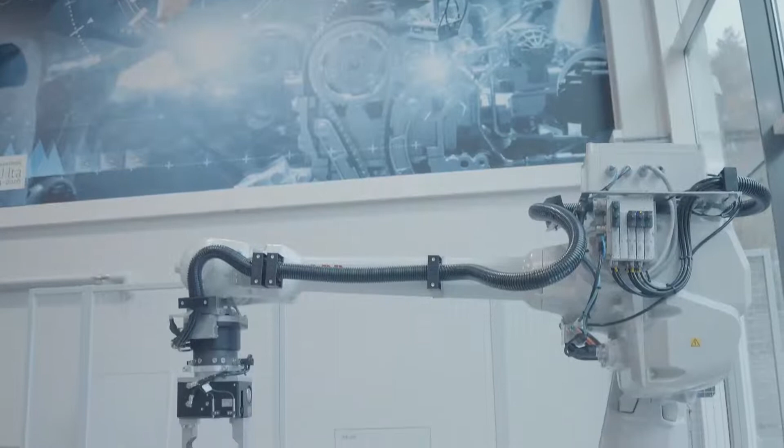JAMK is a leading university of applied sciences in the area of technology and is located in Jyväskylä, Finland. It has a strong track record as an outstanding educator for bachelor's and master's of engineering. Its focus areas cover mechanical engineering, electrical and automation engineering, logistics and information technology, but also multidisciplinary applied sciences such as automation and robotics. Automation and robotics are one of JAMK's 6 areas of expertise.

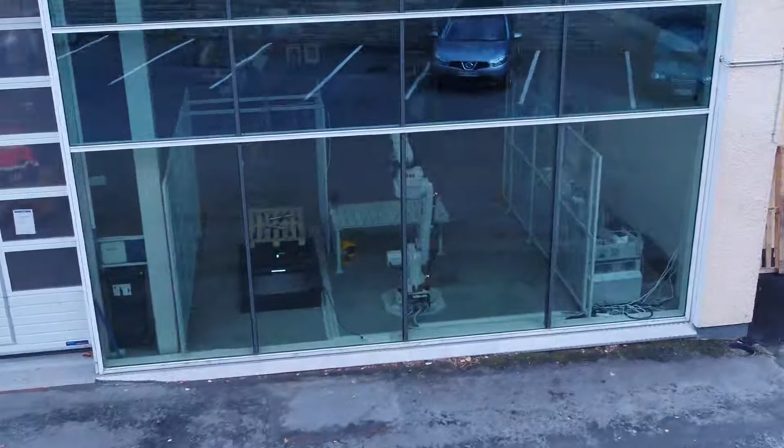Robotics by JAMK combines JAMK's multidisciplinary skills in automation and robotics. Companies and organizations can utilize Robotics by JAMK's testing, piloting, and simulation environments. We also help management and work communities to introduce robotics. The industrial robotics laboratories are located on our main campus. The laboratories cover many robotics-related environments and technologies.

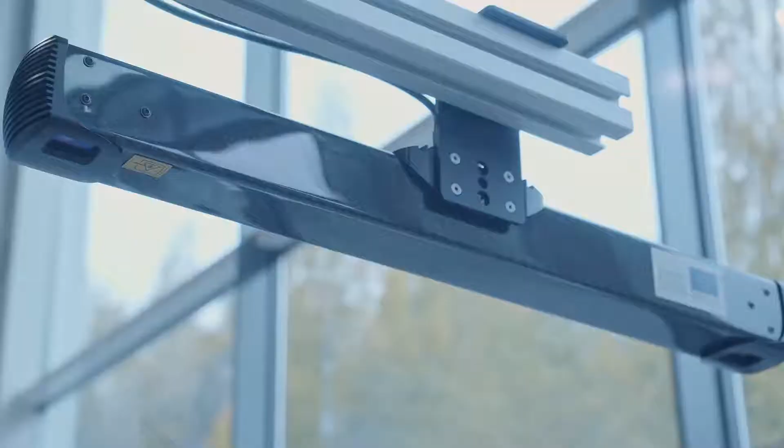The latest environment is represented by a robot cell that combines traditional industrial robotics with the latest trends, collaborative robotics, mobile robotics, and 3D machine vision. The mobile robot serves the robot cell autonomously. The 3D machine vision system detects and locates objects for an industrial robot. The robot cell ensures the efficient and fast handling of heavy objects safely.

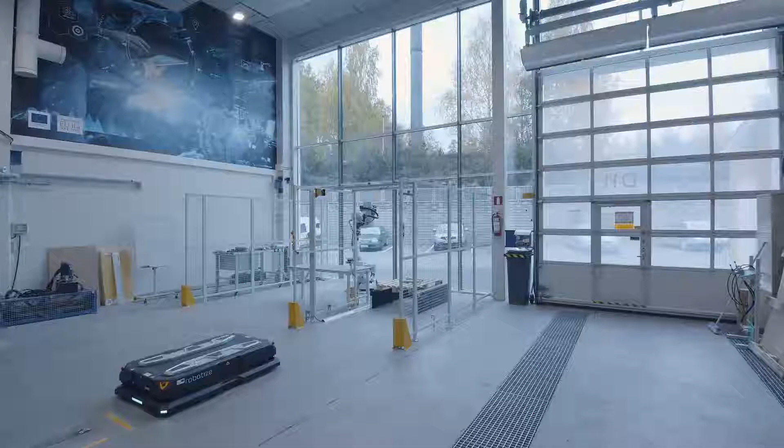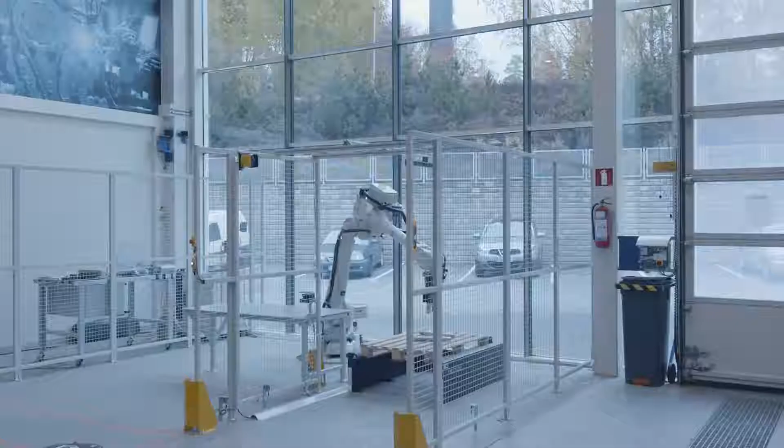When a person moves closer to the cell, the industrial robot goes into collaboration mode and slows down its speed. When a person enters the shared work area, the robot stops, and continues operating automatically when the person exits the area. The robot cell provides a wide range of applications for companies to test robotics. In training, the environment can be utilized for robotics, machine vision, and automation safety.

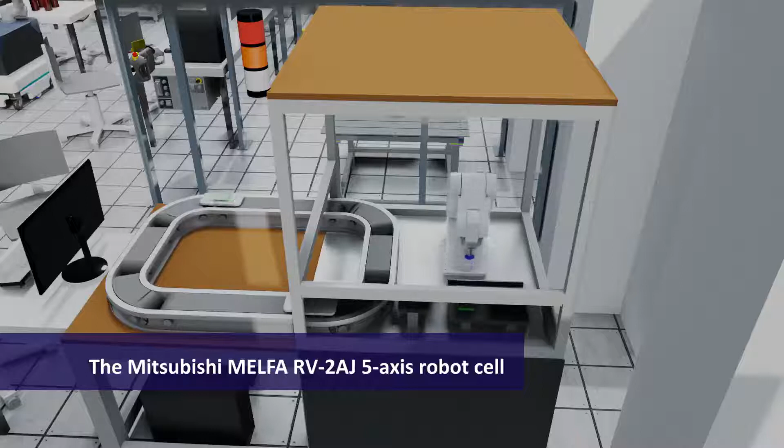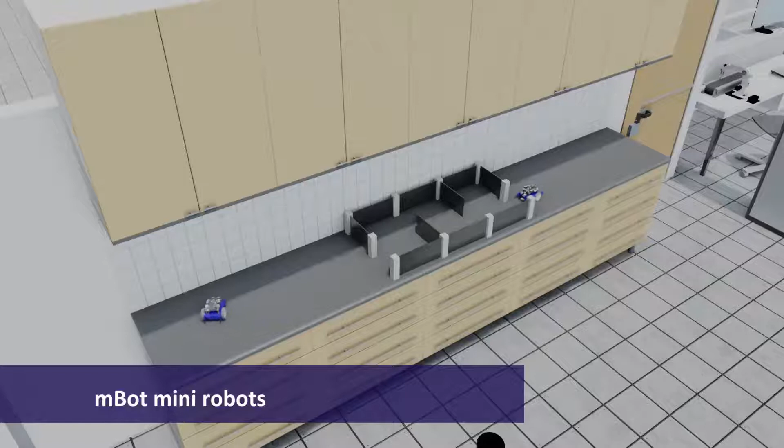Welcome to the robotics laboratory, Origo. The laboratory is utilized in engineering training and development and research with companies. The Mitsubishi MELFA RV-2AJ 5-axis robot cell represents an older robot environment still used in robotics and machine vision teaching. The lab has mini robots from different manufacturers, for example, for teaching programming. These mini robots driving on the table are mBots.

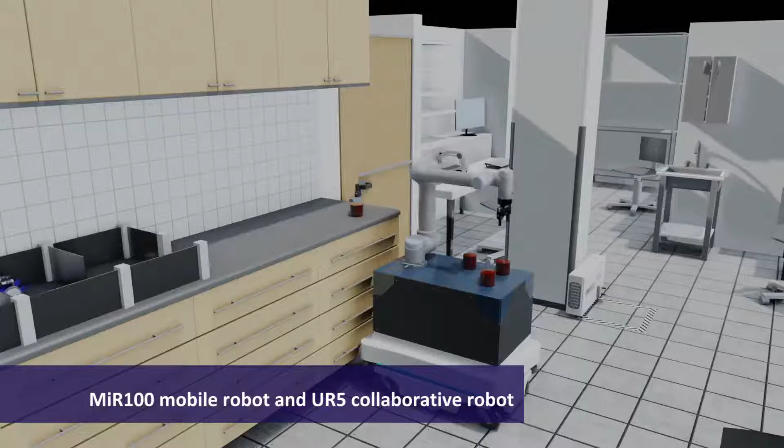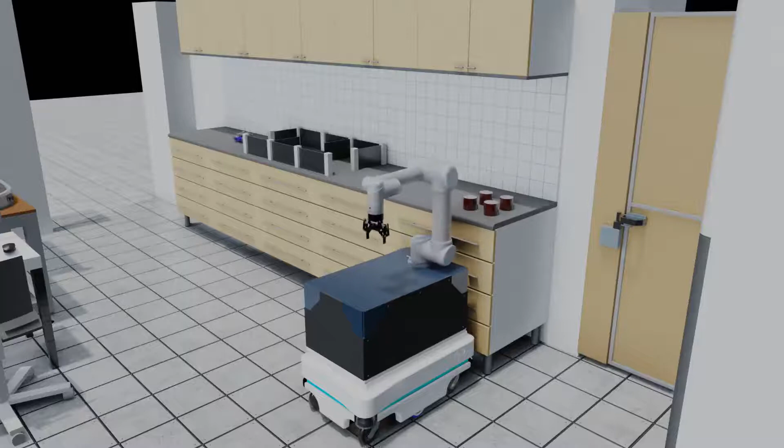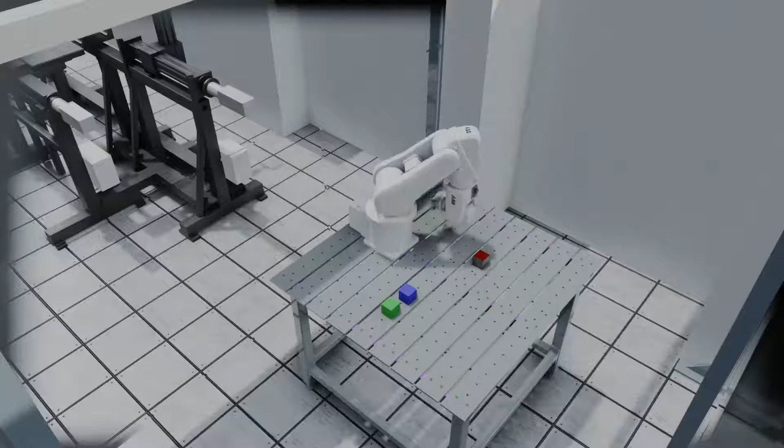The MiR100 mobile robot and the UR5 collaborative robot can be used separately or integrated together to collaborate with people. New robot technologies enable the moving of laboratory environments from one location to another, and if needed, also to company premises. The ABB IRB 120 6-axis robot cell is one of the most general environments in engineer training. The robot has 3 tools and an automatic tool changer.

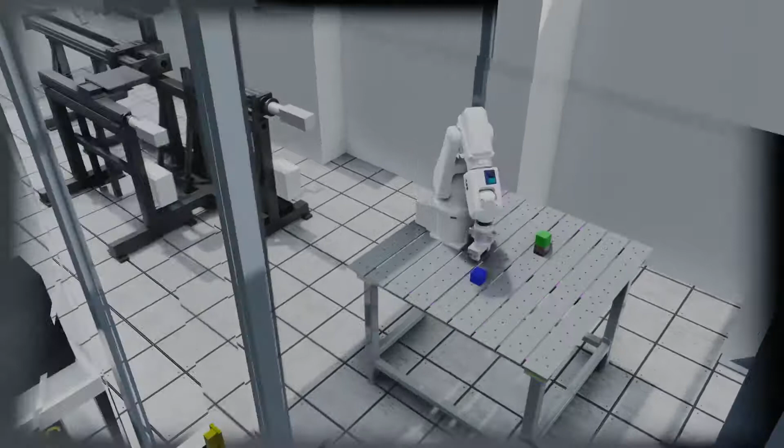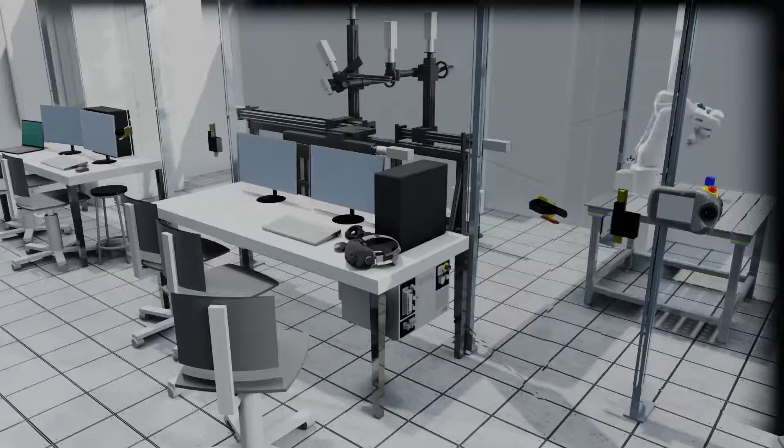Training includes many simulation environments such as ABB RobotStudio and Visual Components. VR glasses allow us to see, for example, robot cells working in a car factory. This lab presentation is also done with Visual Components. Companies can test machine vision applications on a survey station. The survey station can be used to find optimal imaging geometry for a company's applications.

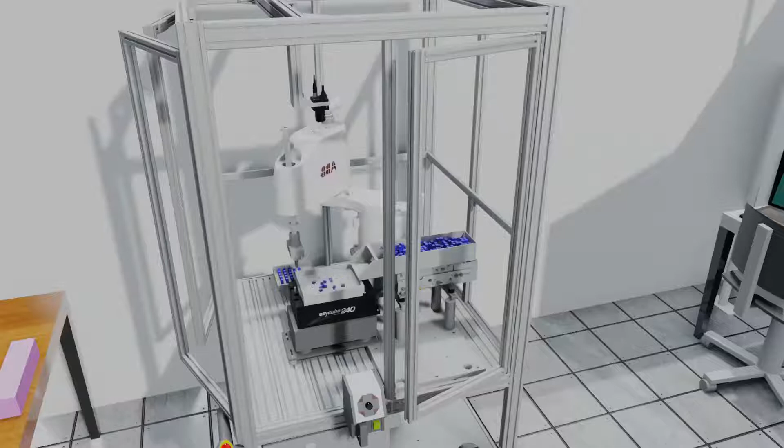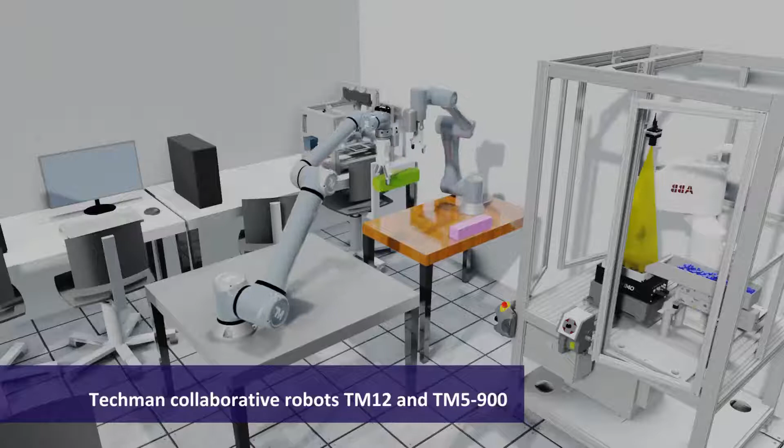The ABB IRB 910SC is a SCARA-type robot with integrated machine vision and an object sorter. The SCARA cell can be used to handle small objects, especially in speed-sensitive applications. Our 2 Techman collaborative robots can work together on 2-handed applications. The smaller collaborative robot can handle 4 kilograms, and the bigger can handle 12 kilogram loads. Both robots have integrated machine vision systems and electrical grippers.

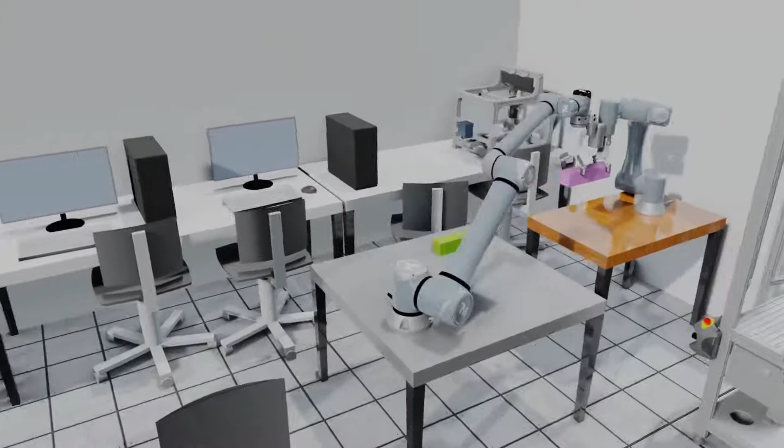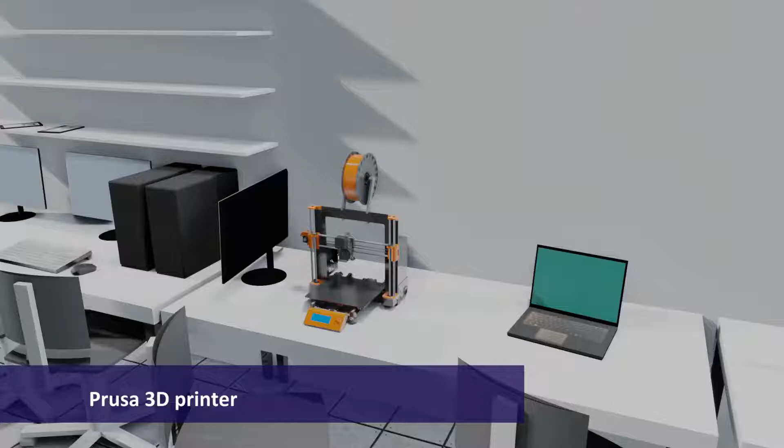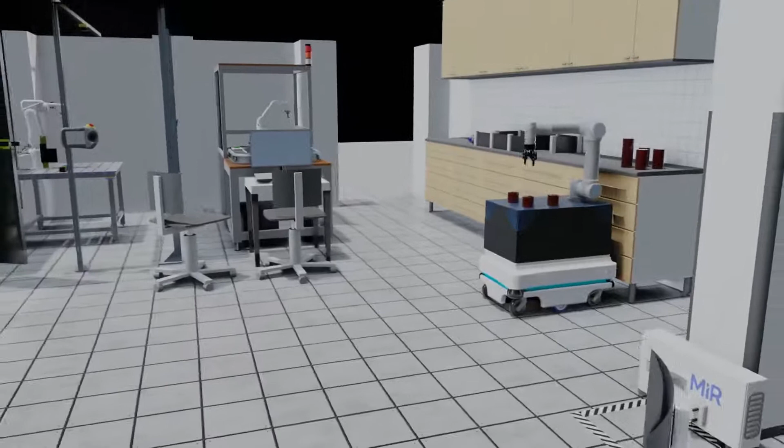3D printing is an essential part of our business research and development. Printing allows us to create entire tools for robots or jigs for applications. The laboratory environment also includes several machine vision systems, tools, and software for training. Here's a look at daily life at the laboratory. Environments adapt to the needs of education and business collaboration.

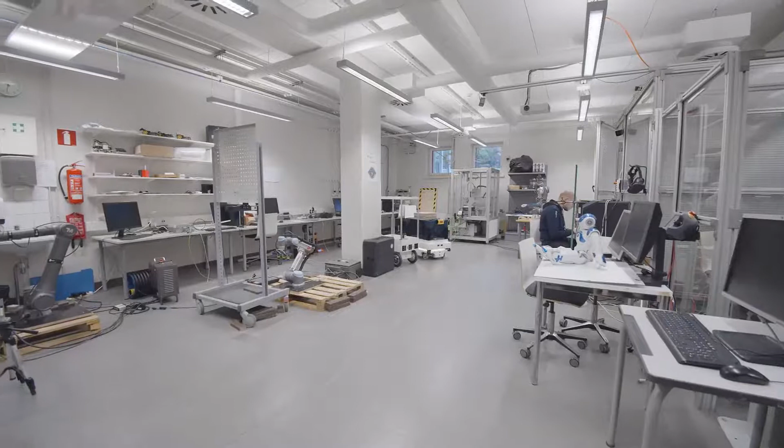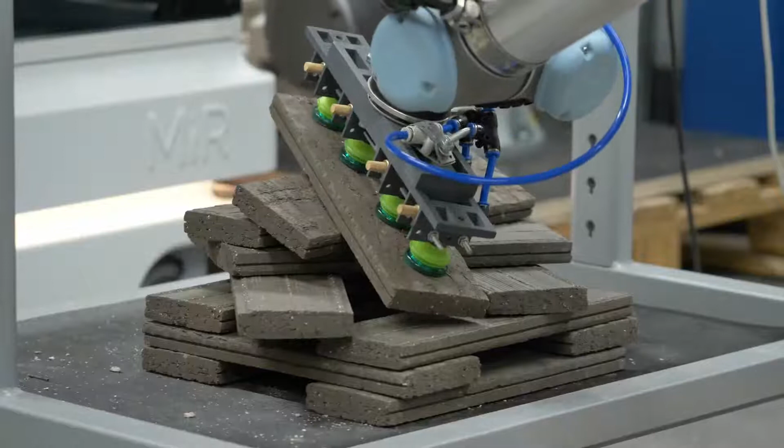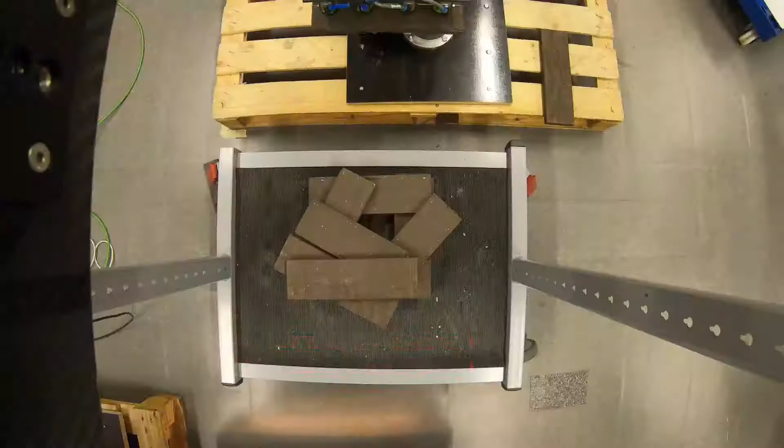For example, the bulk picking and stacking application of bricks for a construction company utilizes collaborative robotics and 3D machine vision. The 3D machine vision accurately tells the robot where to pick up the next object. The robot's vacuum gripper is designed to meet application needs.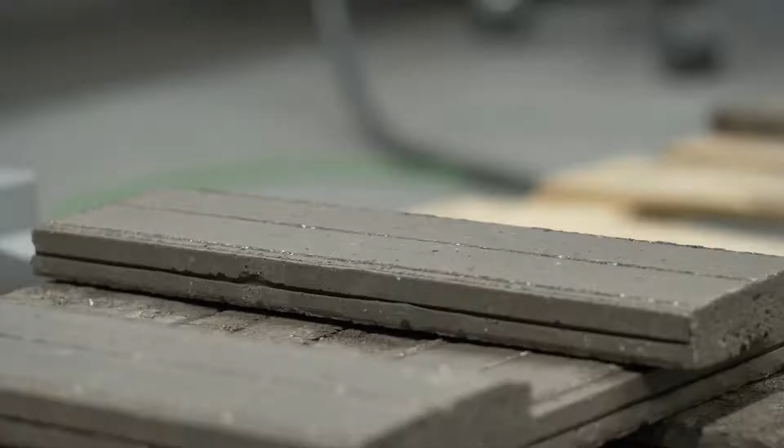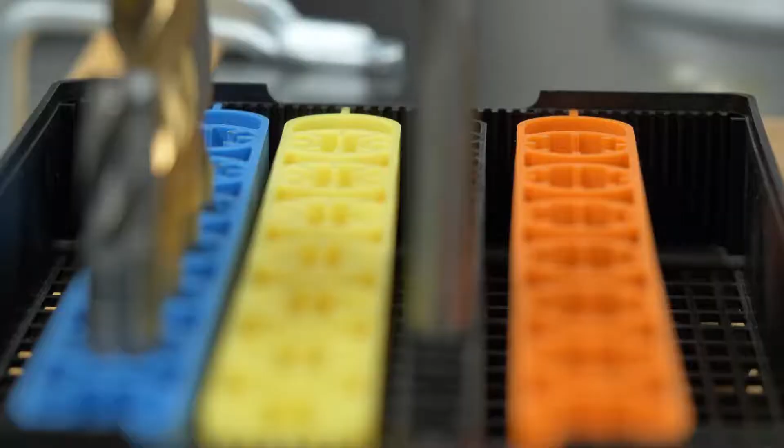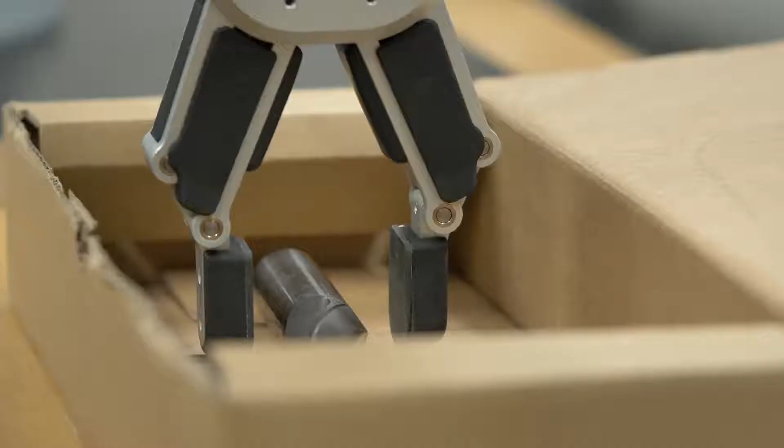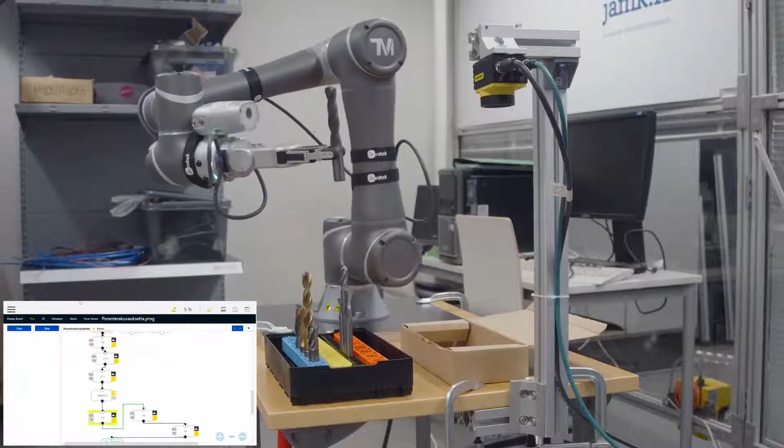This example simulates quality control and sorting of milling tools with a collaborative robot and machine vision. We want to sort blades automatically based on repair needs and size. The robot puts the item under the machine vision camera, which sends the results back to the robot. The robot's task is to place the object in the correct tray.

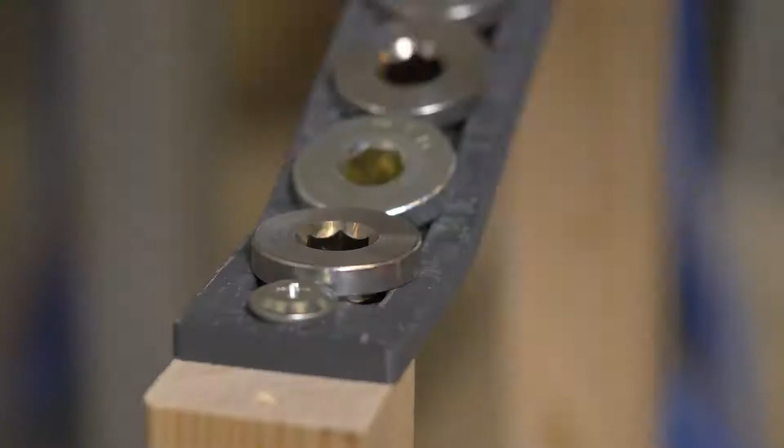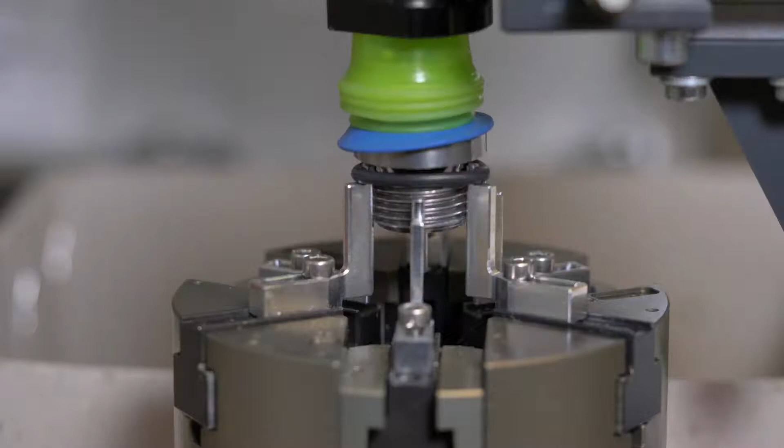One company needed to automate the assembly of hydraulic parts. Manual assembly is a tiring and time-consuming task that needs to be easier and faster. The goal is to pick up and put the O-ring into the plug. The application uses grippers and object handling in a versatile manner. Finally, the SCARA robot uses machine vision to ensure that the assembly meets the quality requirements.

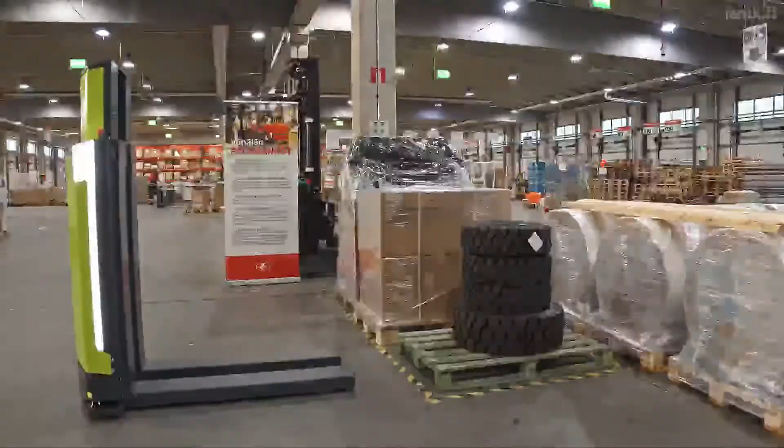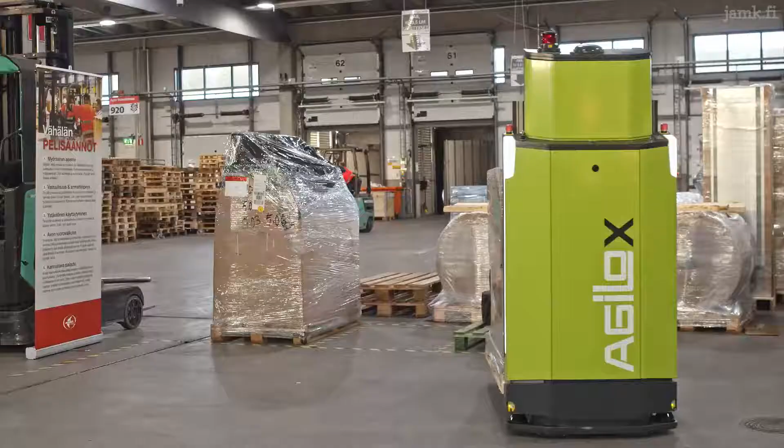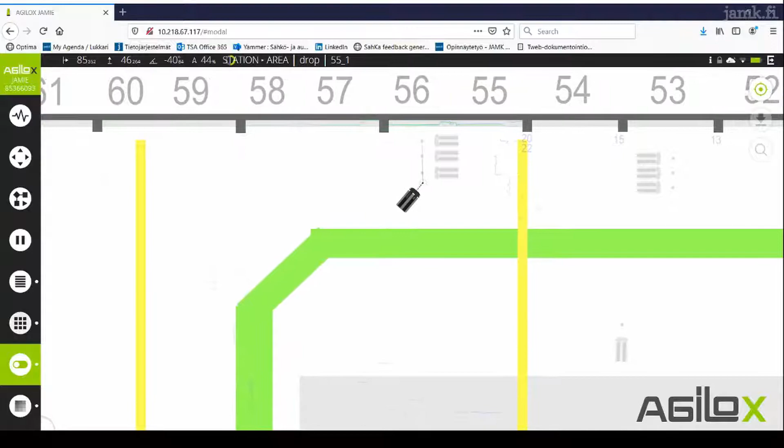Mobile robotics has also been tested for company needs, for example, in logistics centers. We needed to find out how well modern mobile robotics can cope in a busy and challenging environment. Piloting often aims to support companies' investment decisions and risk management. The Agilox mobile robot, leased for this pilot, can lift pallets that weigh up to 1,000 kilos from the ground and move them autonomously to a predefined location.

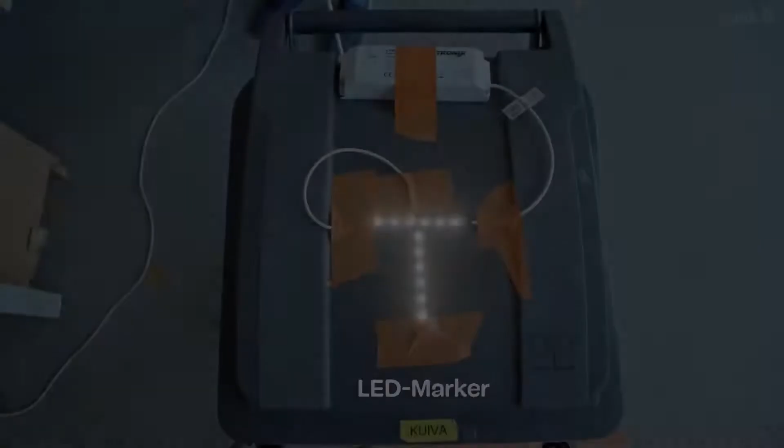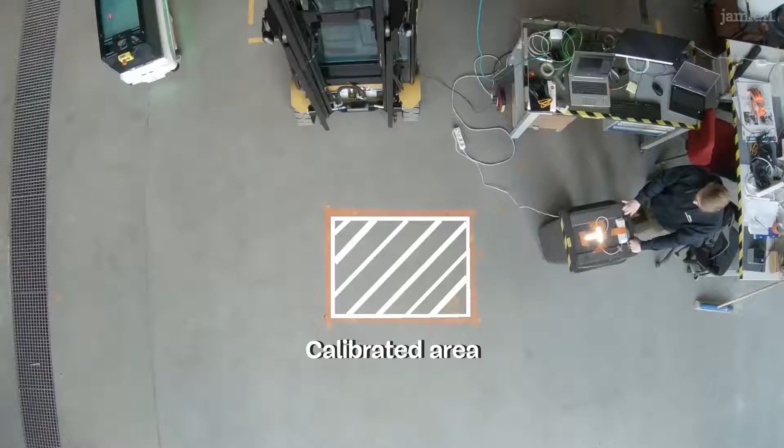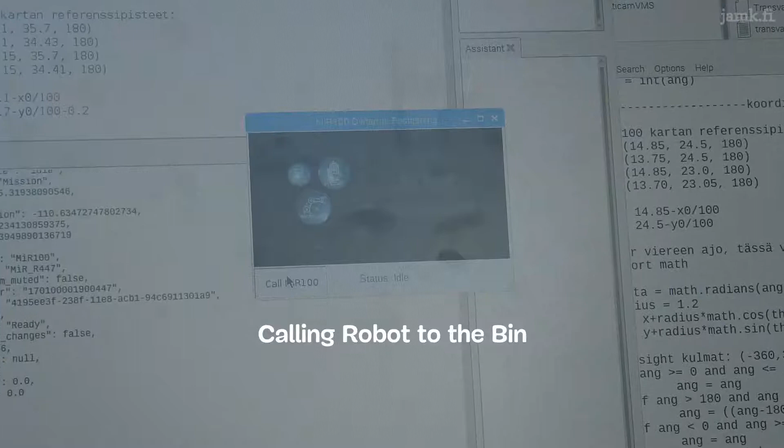In one piloting of mobile robotics, we determined if the location of a search object could be changed dynamically. This kind of situation could arise, for example, if a person had moved the search object to an arbitrary location. In this case, we utilized machine vision and an LED marker to automatically locate the object. The client company is involved in developing an Internet of Robotic Things platform that allows robots and external devices to communicate. One issue to solve was robot positioning accuracy when picking up the waste container.

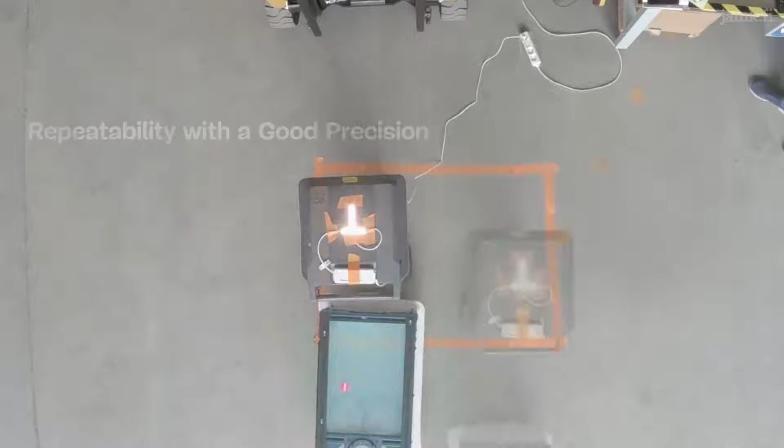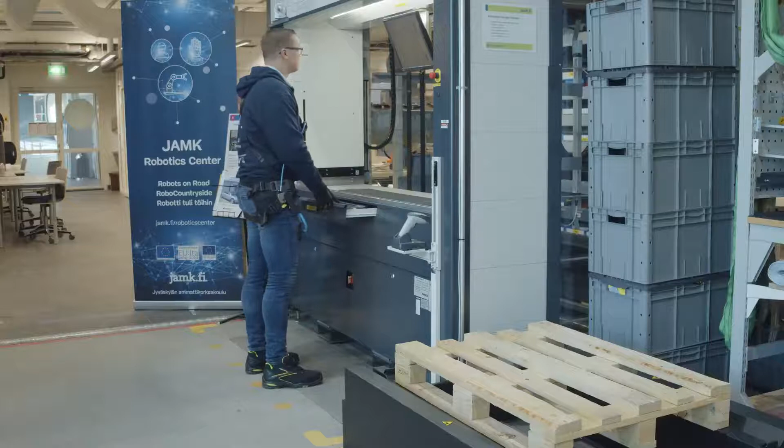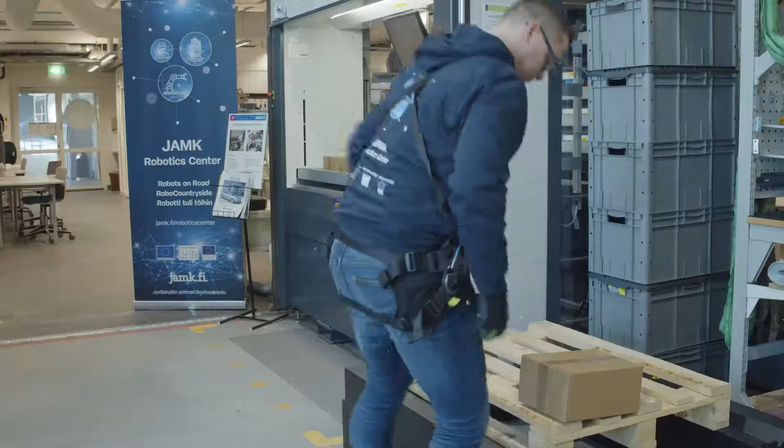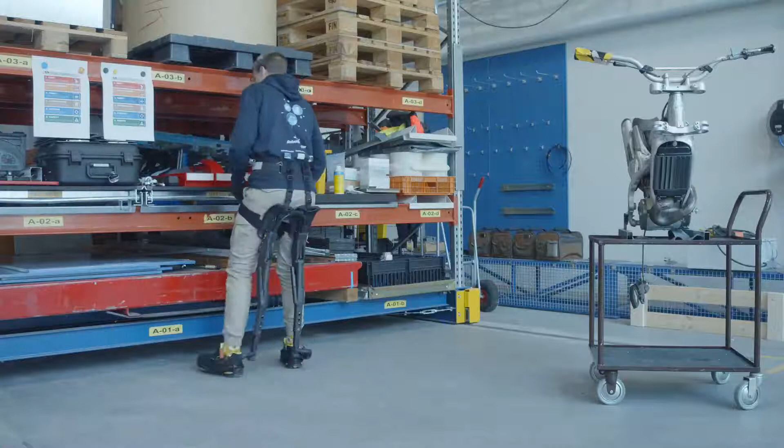Laboratories have also tested different types of exoskeletons to make human manual labor easier. Technology can improve well-being and efficiency at work, for example in production and logistics companies. Exoskeletons can be adjusted for each person and application. Versatile solutions streamline work, for example by facilitating squatting and standing.

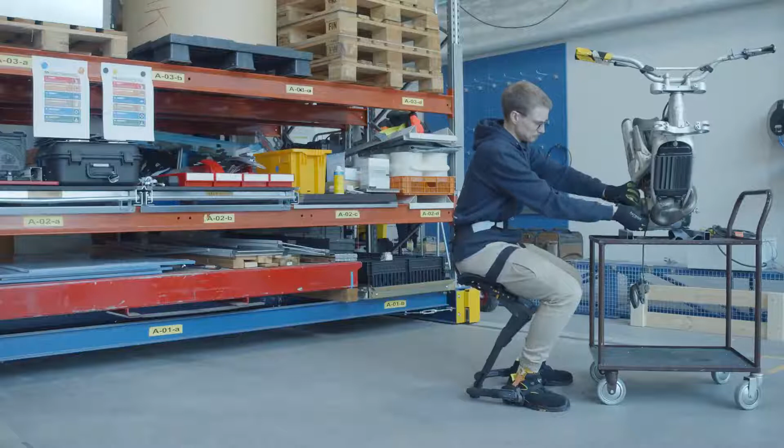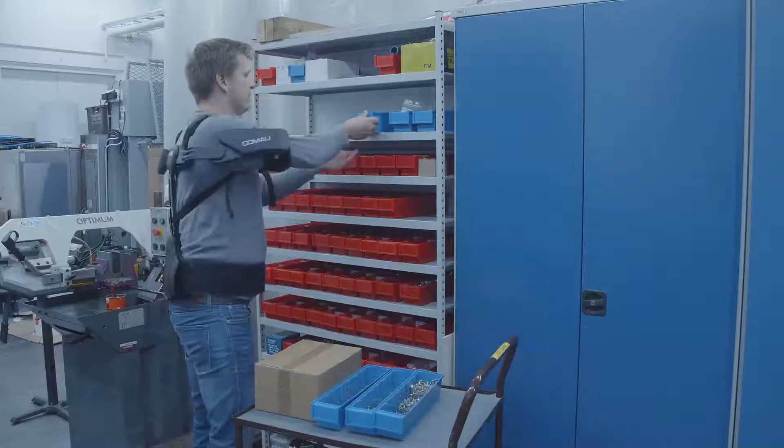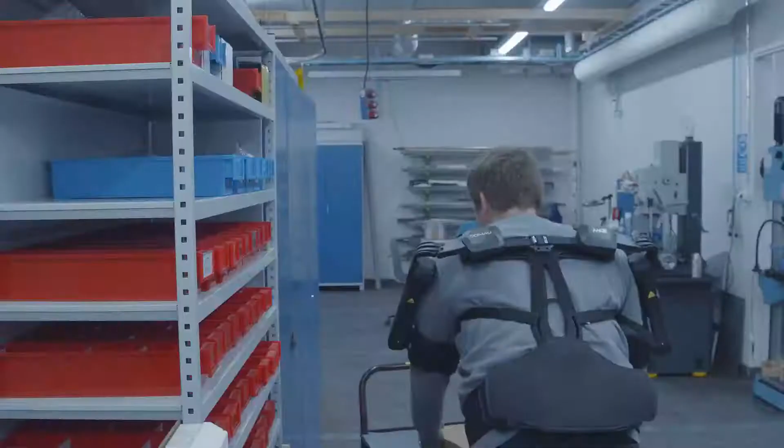YAMK's field of automation and robotics is in close multidisciplinary cooperation with well-being and business units, among others. Robotics and new technologies are introduced to companies, taking occupational safety, well-being at work, and change management into account. In addition, YAMK works closely with equipment suppliers in the field. Finally, let's sum up YAMK's robotic laboratory environments.

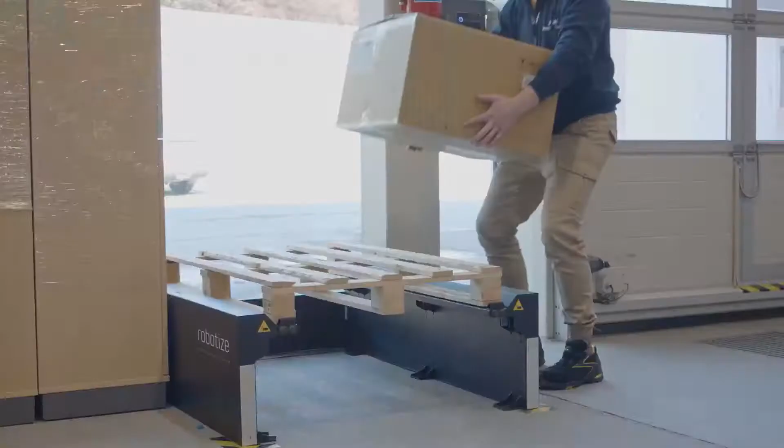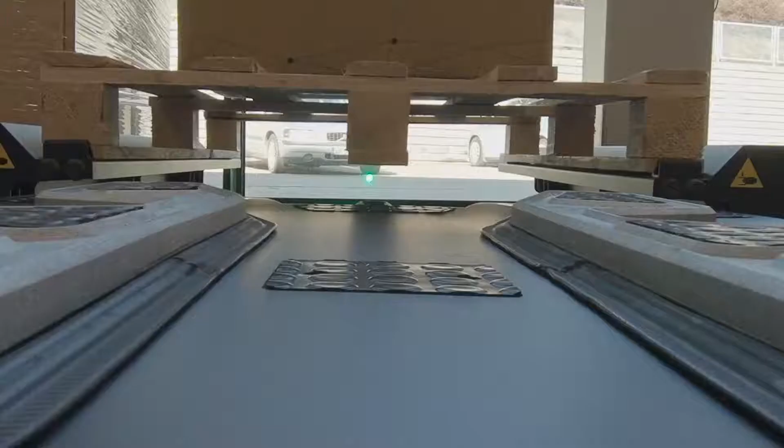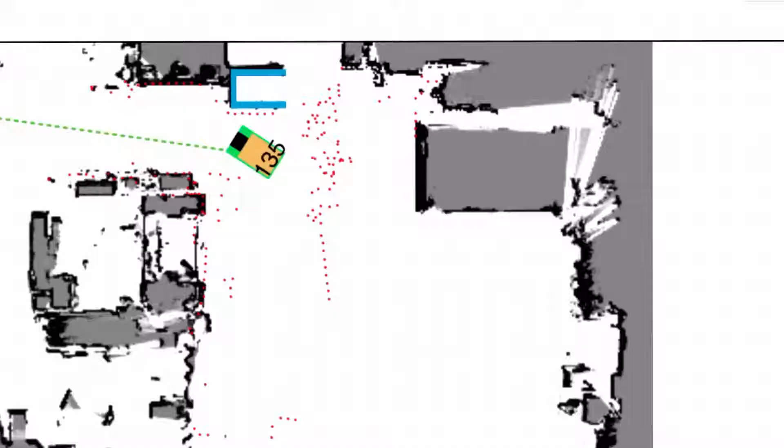Robotics laboratories are utilized in a versatile manner for the needs of education and business research and development. The laboratories cover a wide range of robotics, such as mobile robotics, collaborative robotics,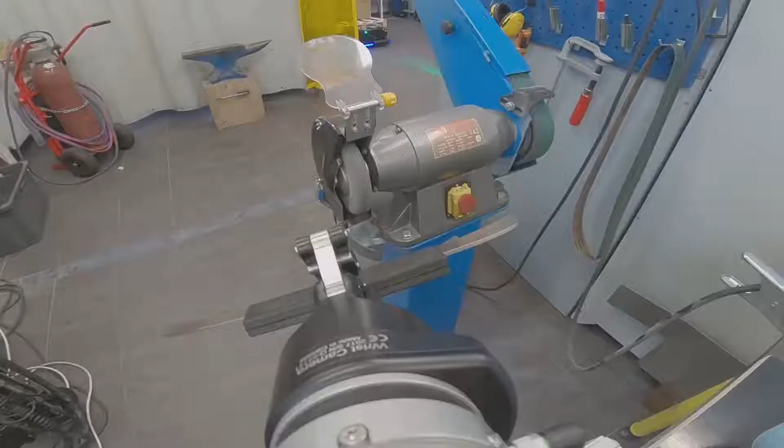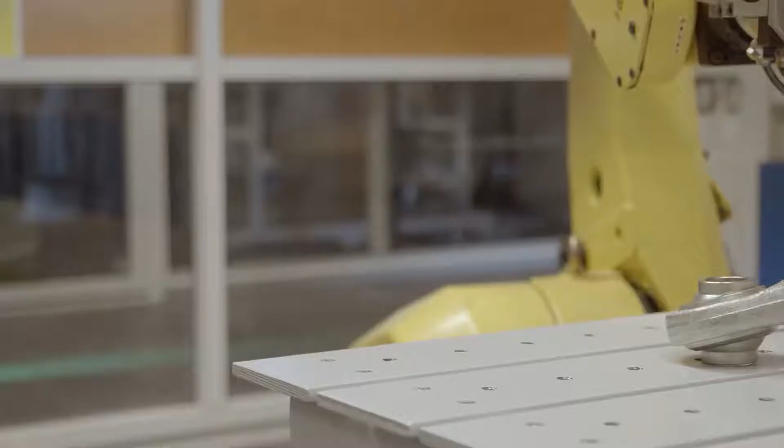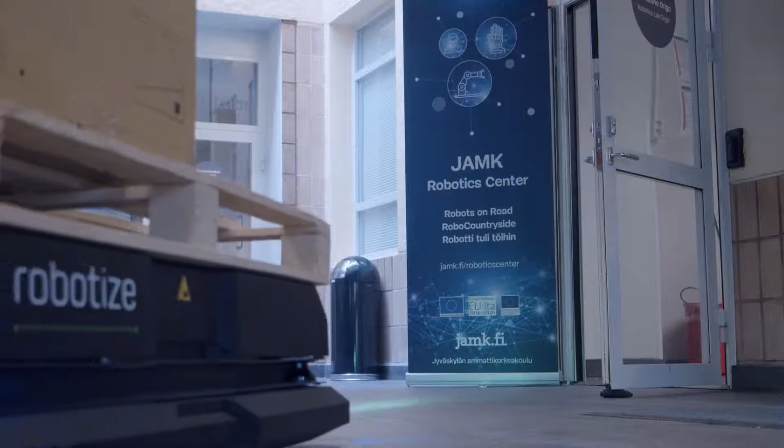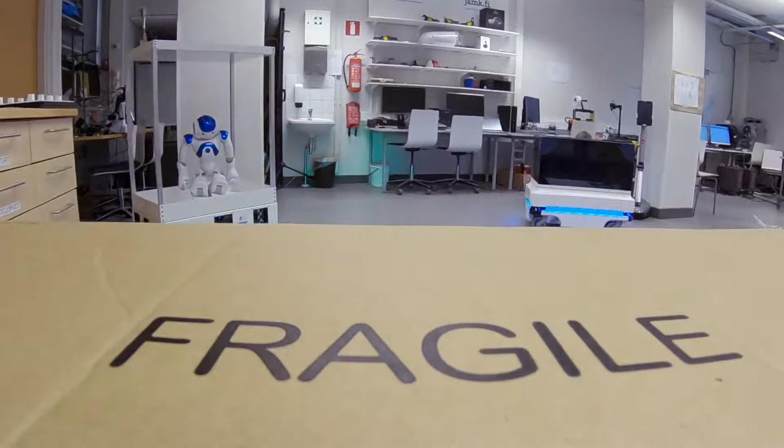industrial robotics, machine vision, service robotics and mini-robots, and various simulation and programming environments.

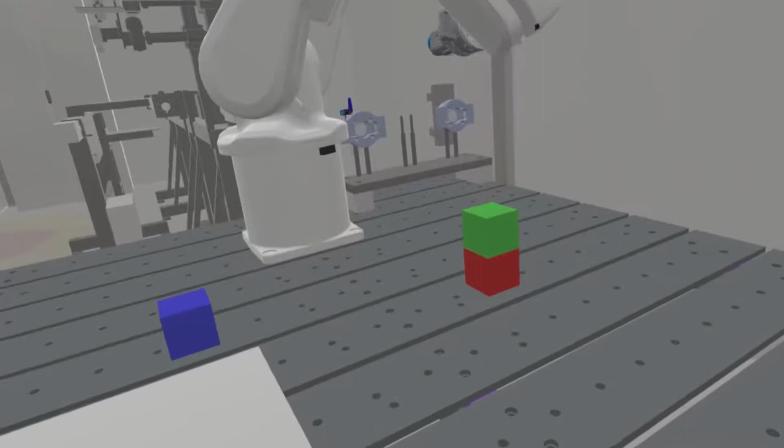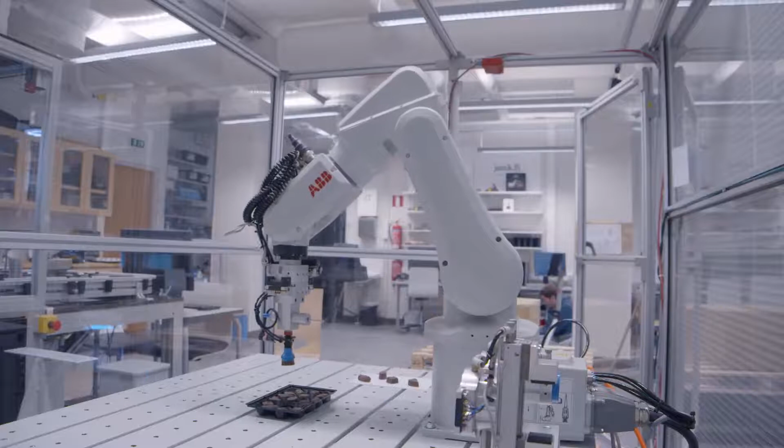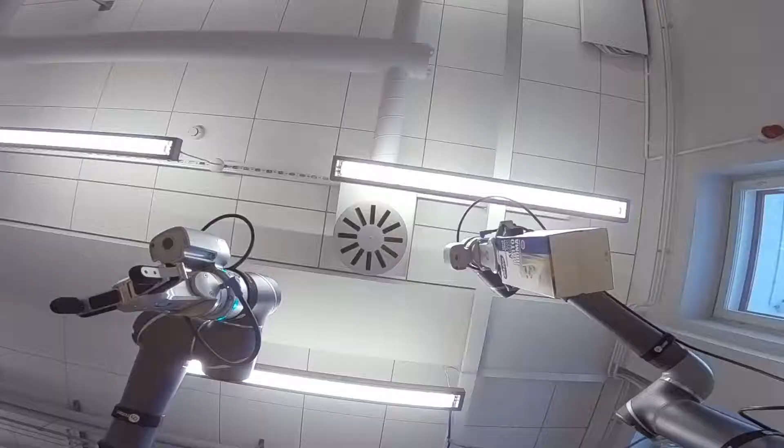We do business cooperation with several industries, like the food industry, logistics, machine manufacturing, and construction products industry. Students do close cooperation with companies in the region through project and thesis work according to company needs.